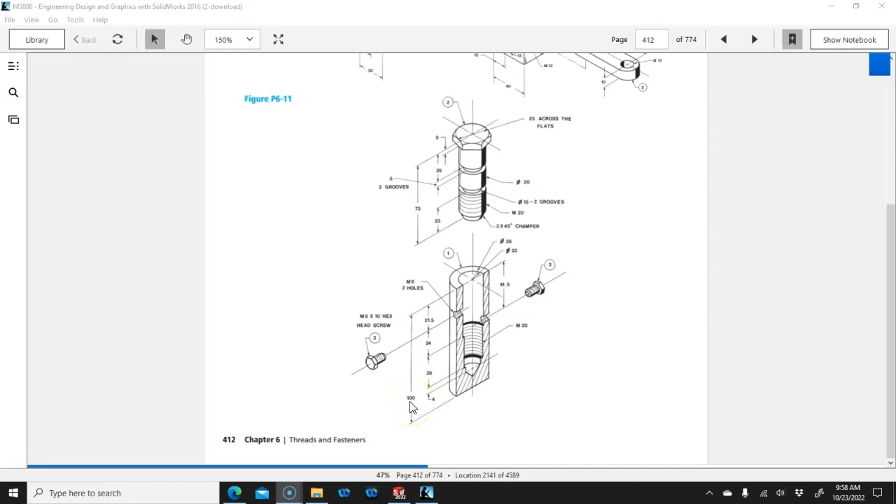The hex screws are going to be from the assembly toolbox or the library of hardware. So let's fly this out of the way. Oh, I don't think it went. There we go.

And we'll start with the screw. So I already have a part open. Now it is in inch, pounds, and seconds, so I'm going to switch over to millimeters, grams, and seconds.

We'll start on the front plane. And I'm going to stay with the S key here, so if you prefer right mouse button and sketch entities, or still have the command manager, it's about time to start experimenting with some of these other options.

So S key and center line, vertical, infinite length. I'm going to place that on the origin. Again, the advantage of our infinite length center line is we won't run out, we won't draw over top of it. There will always be something there.

So this is going to give me a radial, which I'm not sure what I want, but if it's the M20, I can put that in as 10.

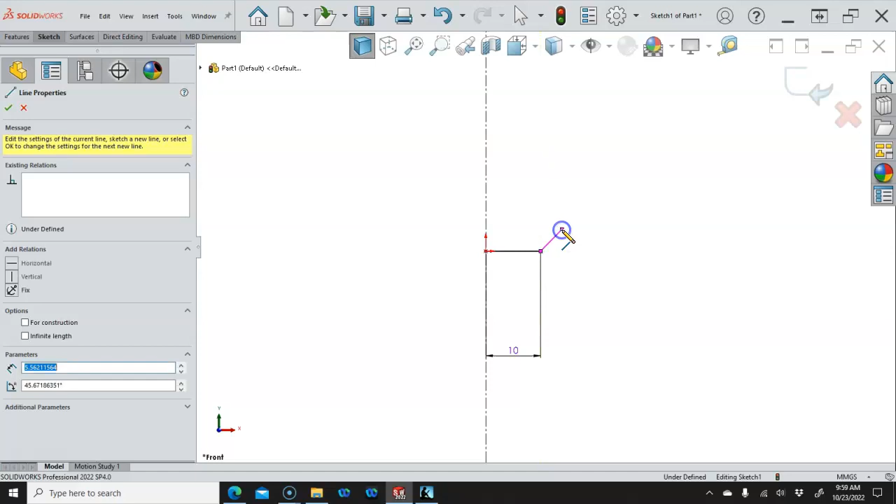And the choice here is, do we include the chamfer in the sketch, 3x45? And these dimensions are going to get a little complicated, so I'm not going to worry about putting them in.

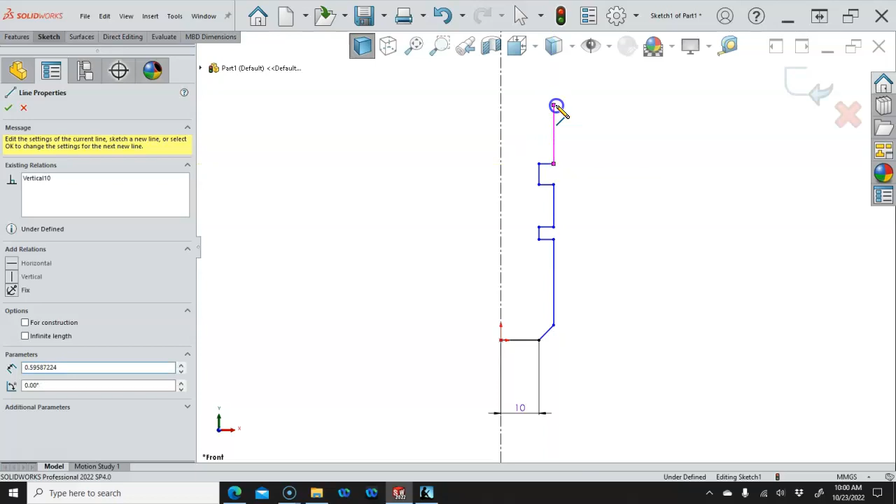And we have the 2 slots. And then we'll pick up for the

hex head. Now the issue with the hex head is going to be, well, it's not round, so if I include it in the model geometry for the revolve, and once I close it off, it goes to that shaded area, so it's part of the region.

If I include it, then nope, I missed that. Let's go back and I'll right click. I wanted construction geometry. All right, so if I include it in the revolve, I need it for reference, but

if I include it in the revolve, then I'm going to have to do something different with the cut. I'd like to just put the polygon on top and be done with it, but then let's see, if we go with the 25 millimeters across the flats, and because those are both construction lines, it's not going to like that.

So let's try a point, and I can go to the point and end up with the 25 millimeter across the flat.

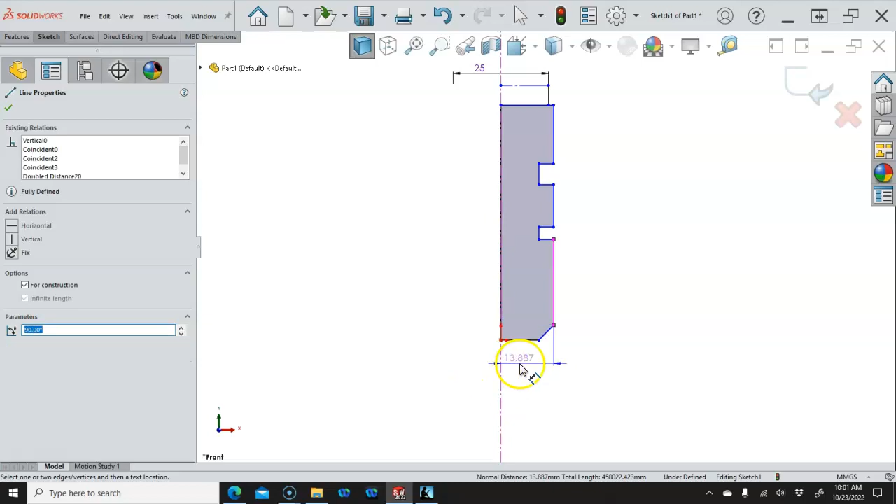Oh, and since I included the chamfer, I actually need to get rid of that one now, and that'll help out. Let's go ahead and apply this as if it was radial.

And let's see, we're at the 10 millimeters there. And let's see if we get out of that. No, I need to actually be in the select.

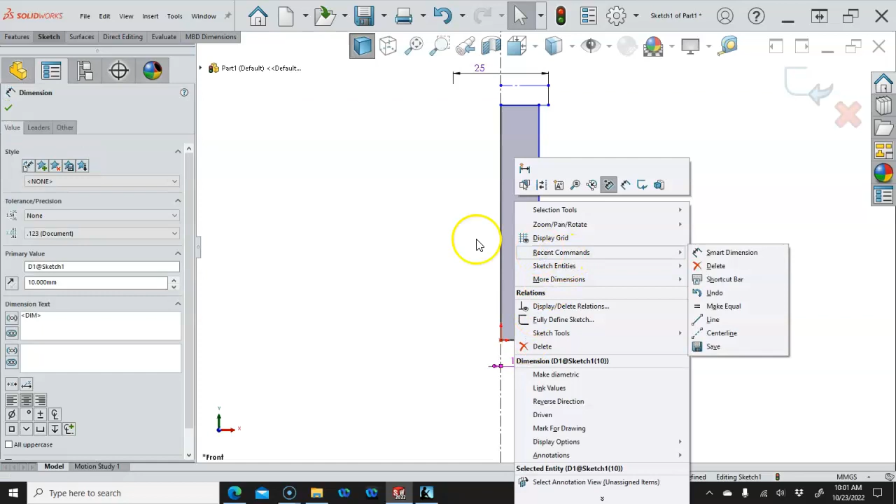So if I pick on the dimension, and I'm not getting those diametric. Oh, so this one is make diametric, so I'm not sure where I was getting those.

So, all right, so this one did not pick a vertical. So the chamfer, so something got coincident or vertical.

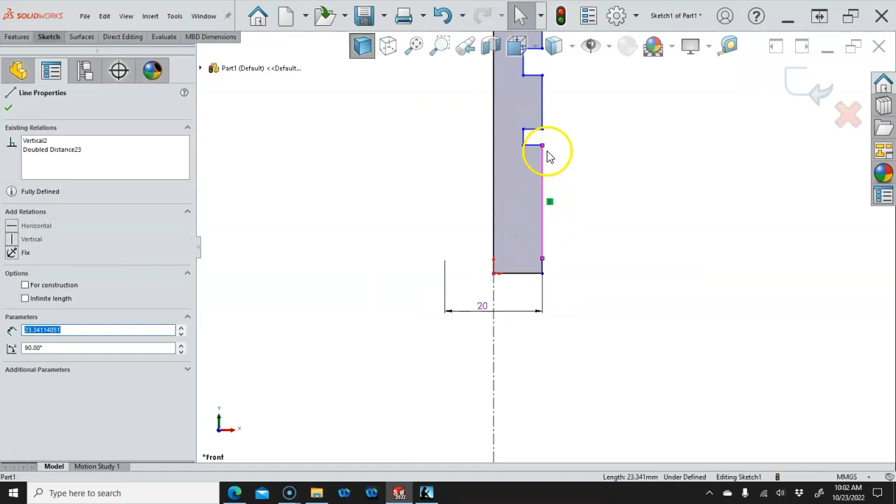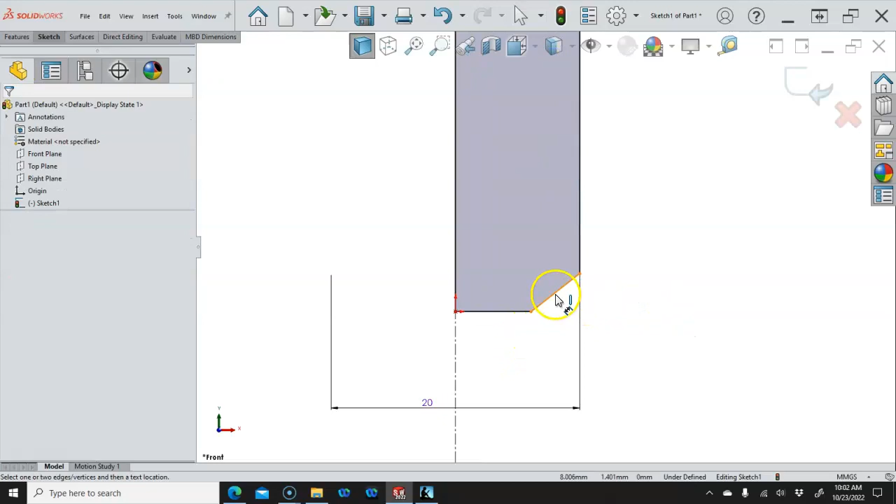So let's see if we can diagnose this out, otherwise I'm going to have to move. Oh, there it goes. I had the bottom one, couldn't see the blue dot. Alright, so we just kind of keep clicking on things until we find which one moves.

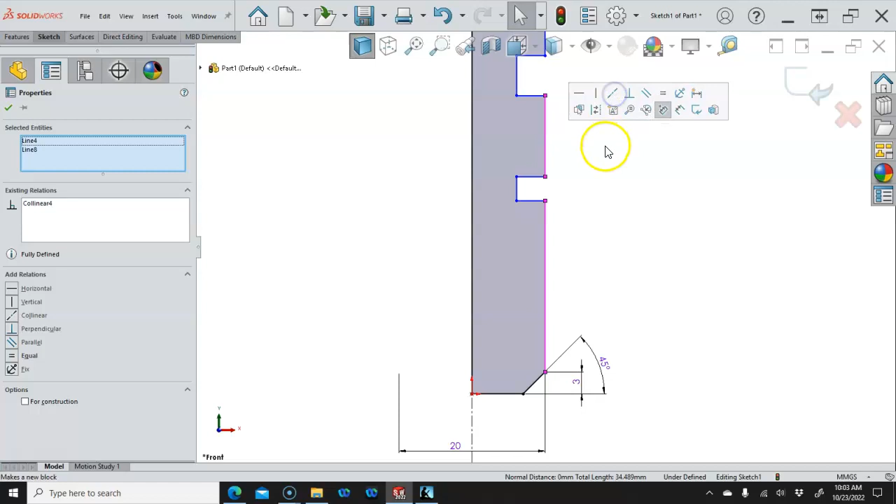Alright, so 3x45 is the same type of definition that we would get if we were applying the chamfer, sketch chamfer, or feature chamfer. And I want those two to be collinear. Actually, I need all three of those to be collinear.

And then the slot is, now we're going to go with the definition. So to the bottom of the slot is 23.

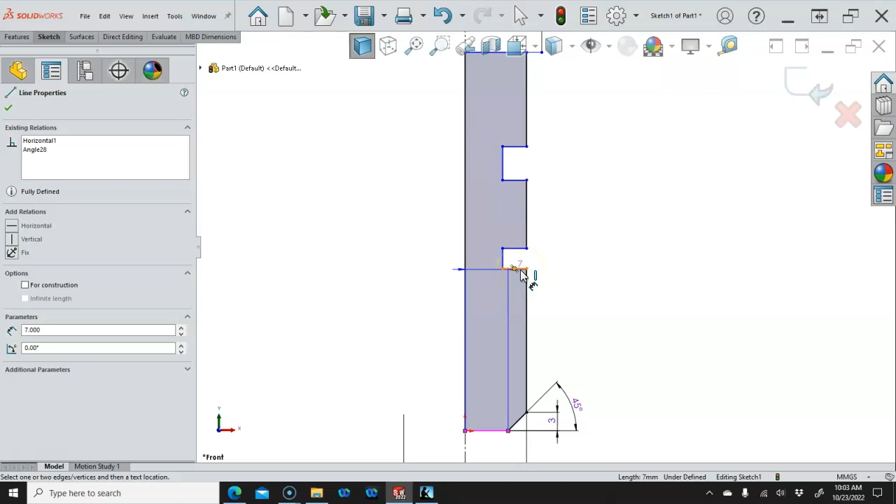And then from the top down, and one of the reasons that we needed the hex is the way they dimension this. So we can do for accuracy, when we make our drawing, we'll clean that up a little bit. Okay, so from the top to the top of the slot is 25. So that gives us our locations. And then 5 millimeters for the two grooves. And since it grabbed the 90, we'll hit escape once.

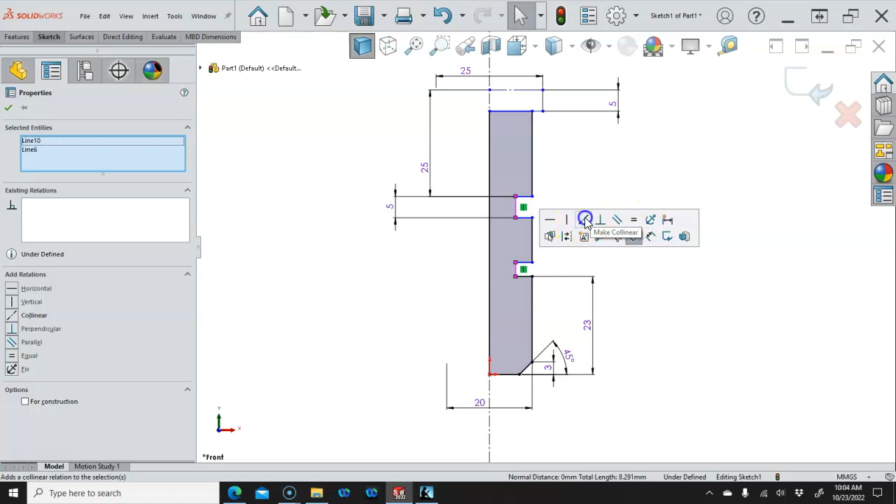And then I can make those collinear as well as equal. And that'll give it the position. And once I pick one of those to add to the dimension, the other one will follow. So if I just come out here to the object line, notice it's highlighting in orange. That's not going to give me the diametral dimension. It's only going to give me radial. So I want to be at 15 millimeters with the diametral dimension.

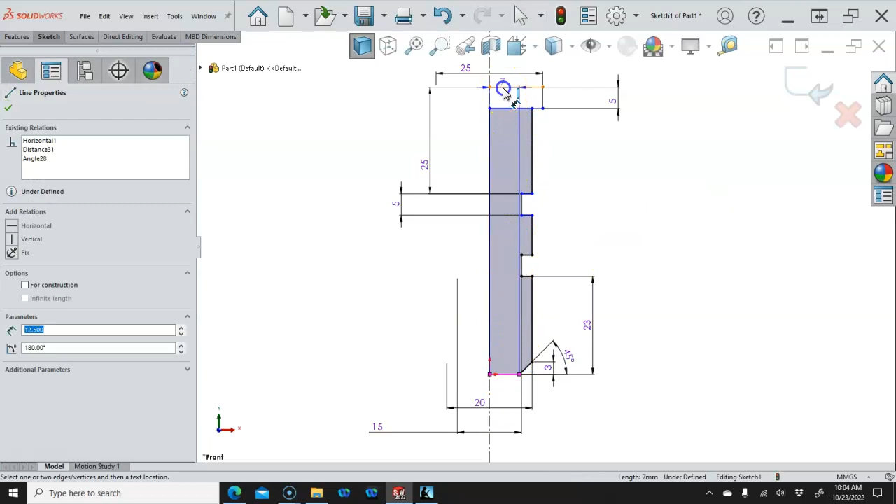And then let's see what's not able, oh, the overall height. So we have an overall height of 73. So just by grabbing that and moving it, that gives me an indication of what's missing and will cause the sketch to go fully defined. Alright, so I think everything's in there. And we have the 25 millimeters across the flat.

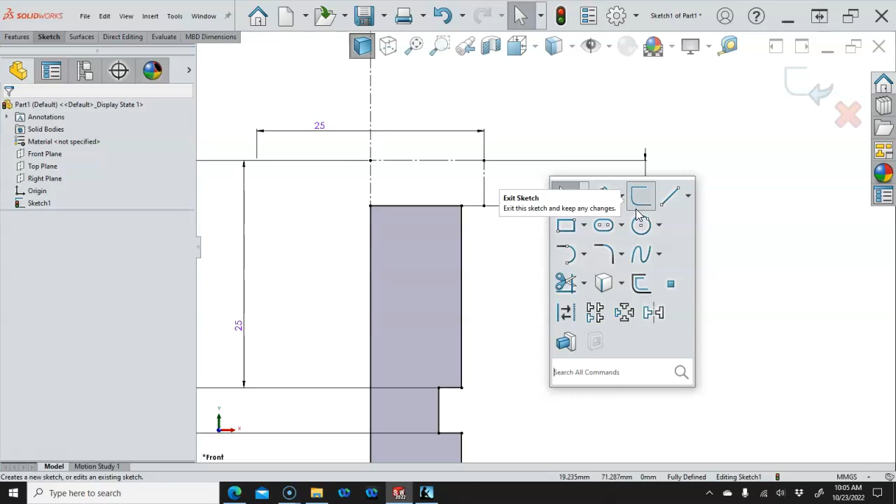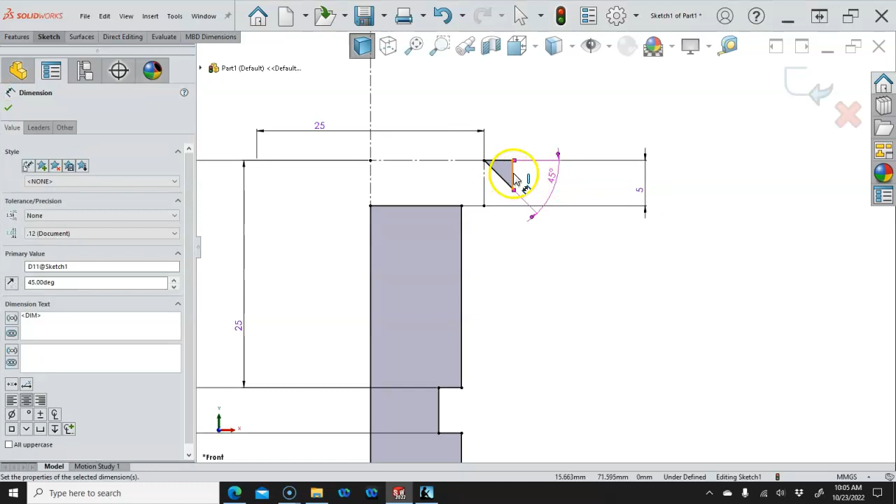So if I were looking to put the, let's see, they call it, I don't see the call out for the chamfer across the top. 3x45 would be pretty big, but it'll pretty much be on the outside. So let's go ahead and just put something in for reference. And no, I did not want the midpoint. So 45 degrees, and maybe that will be 2 millimeters instead of the 3.

All right, so if I go ahead and revolve that, it's going to pick that geometry up. I could pick it as a region and leave it. Why don't we do that? Let's go ahead and pick it as a region, because then I can come back and share the sketch and possibly use that as a cut. So having it two separate features is fine. And because I'm 25 across the flat, I would need this to be to the outside.

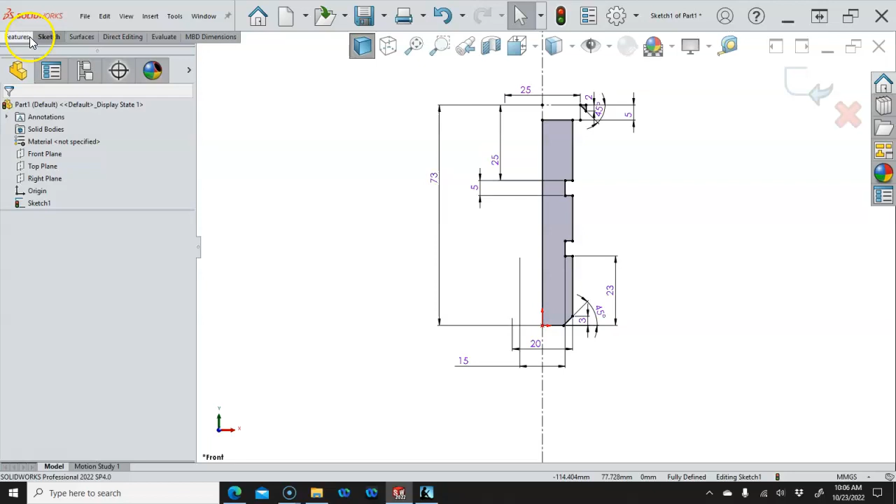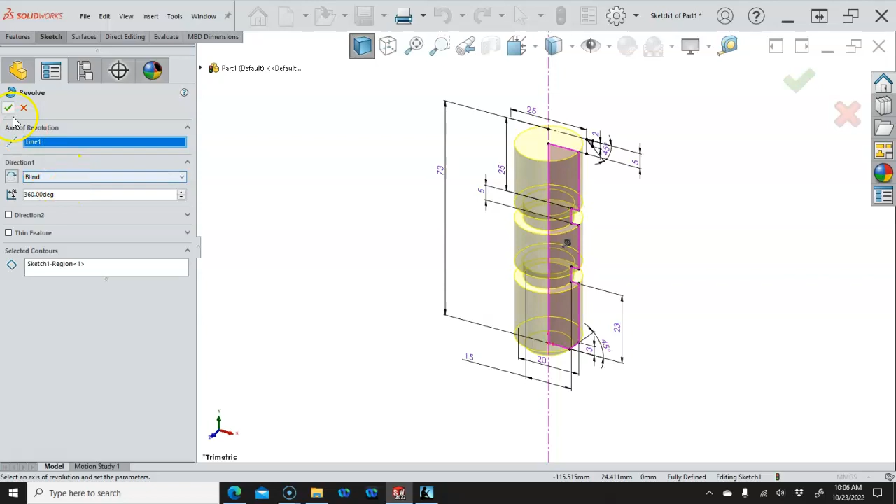When we look at this from the revolve, and I get the hex in place, then I would maybe go to the right plane, could draw that same geometry interior to the polygon, and be able to complete the chamfer cut. So if I revolve, it says they're both enclosed, it's fine, but I really just want that one. So there are multiple center lines, construction lines, so I need to tell it which one, and we're going 360 degrees, so that's fine. I can now go open up the sketch.

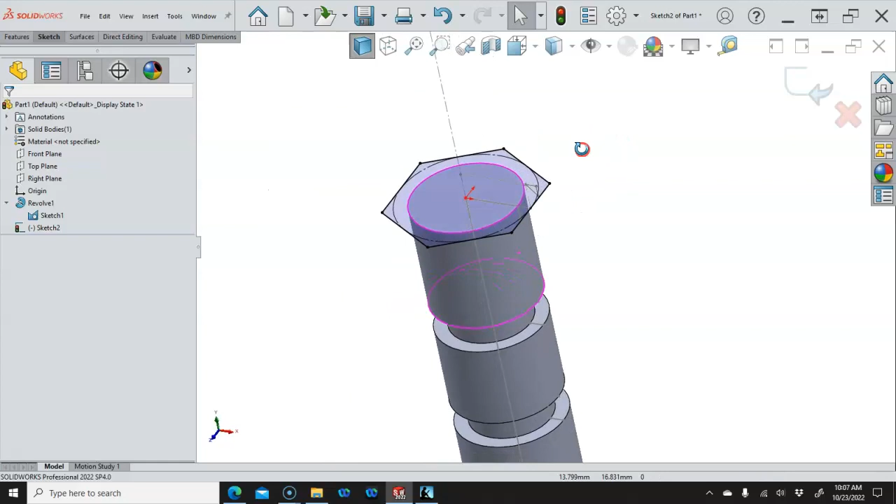We'll go back into the polygon, and if I drag that out, now if I want to use our previous sketch, then I'm going to need to show it, and I can make that coincident with the flat, and one of these will need to be vertical. All right, so some combination of the center point and a vertex to be vertical, or one of the object lines in the sketch to be vertical.

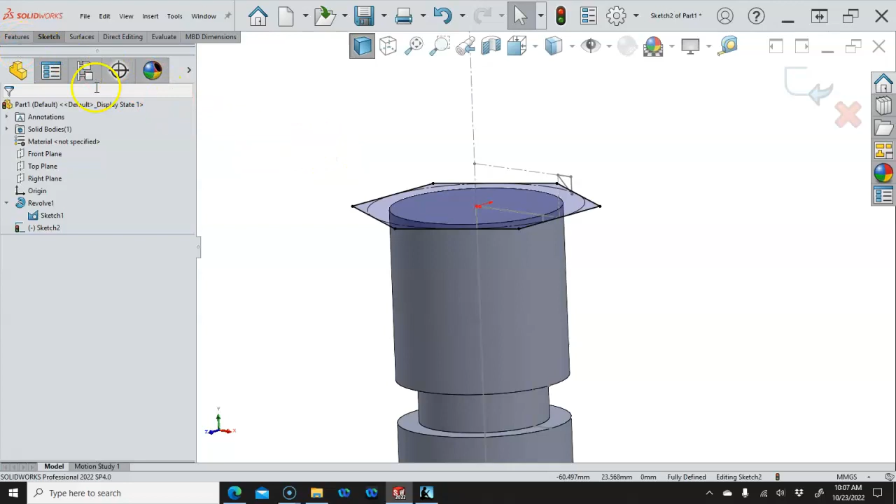All right, and then this is one of those places I could give it the 5 millimeters, but if I'm driving off of that sketch, then we can go into the features, extrude boss base, and this will be an up to vertex. And the vertex is where edges come together or point is generated, and we have that shape. All right, so now you can see it's kind of to the outside of the flat.

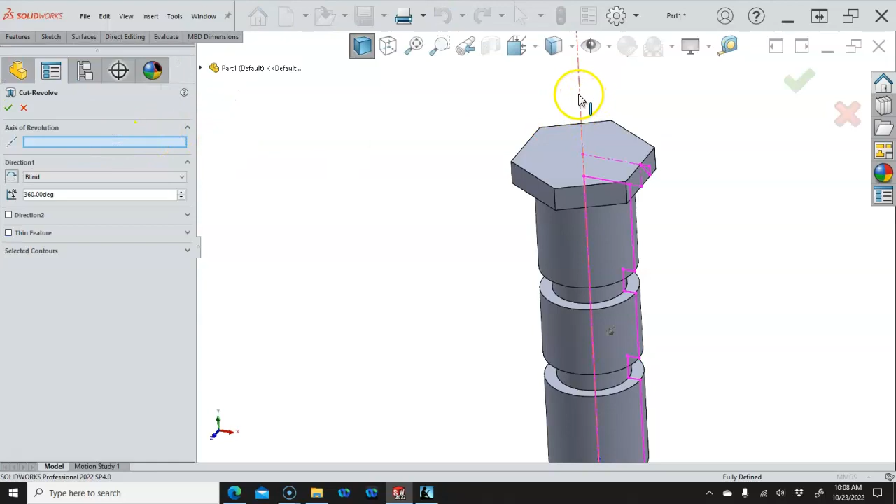And if we go back into that sketch and features, this time it will be a revolved cut, the axis of revolution, and then we need to pick our geometry, which is the interior of that triangle. So when it cuts around the outside, it generates that chamfer.

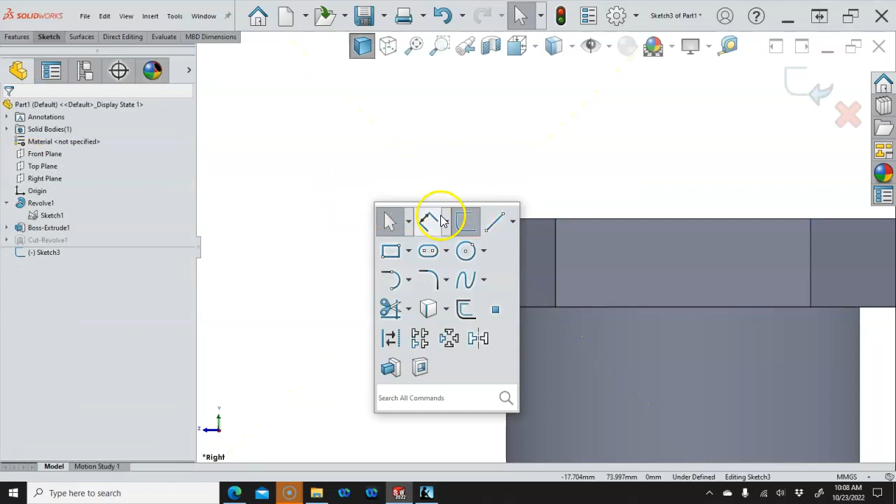All right, the other option then is, nope, didn't want to hide it. I wanted to suppress that feature. So show, suppress the cut revolve. We'll hide sketch 1. And we'll look at doing this on the right plane. And so maybe the advantage of doing this on the right plane is that we are interior to the part. There is a little more visual result there. So 2 millimeters, 45 degrees,

and we could adjust that accordingly. So let's see. We can also, I think I put that on the sketch. So let's see, if we're 25, if we drew that circle, let's make that a driven.

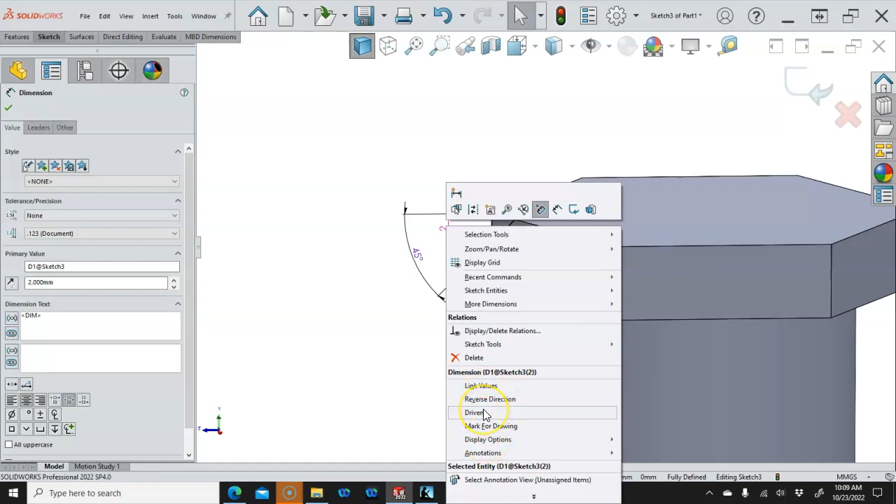And I want it to, or a driven, there it was. All right, so maybe I want to make that a driven part. And we'll go back to, all right, 3. S key center line, didn't do that first, so infinite length vertical. Place it on the origin.

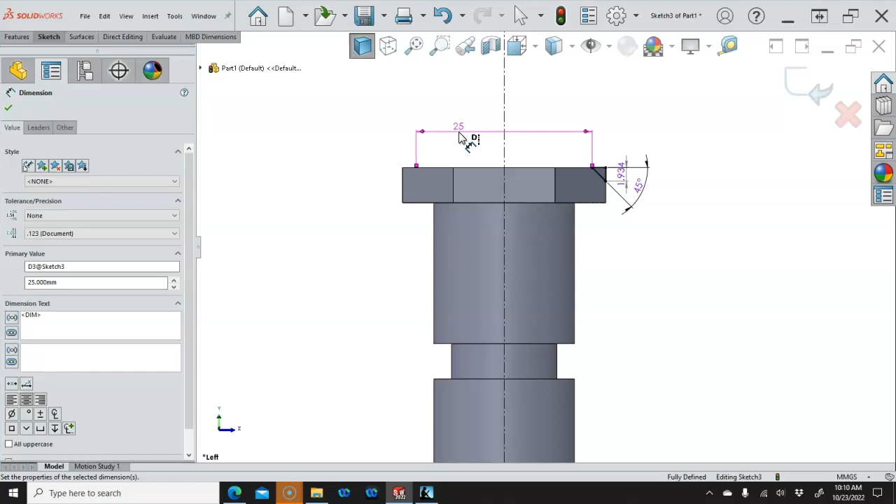Okay, so if we were to go into our dimension and set this to 25, then our value is just a little under 2 millimeters. Is that going to matter? Well, we'll have to compare and see what the result is. So we're going to go ahead with the revolve cut. Now that one you see comes up just about perfectly tangent.

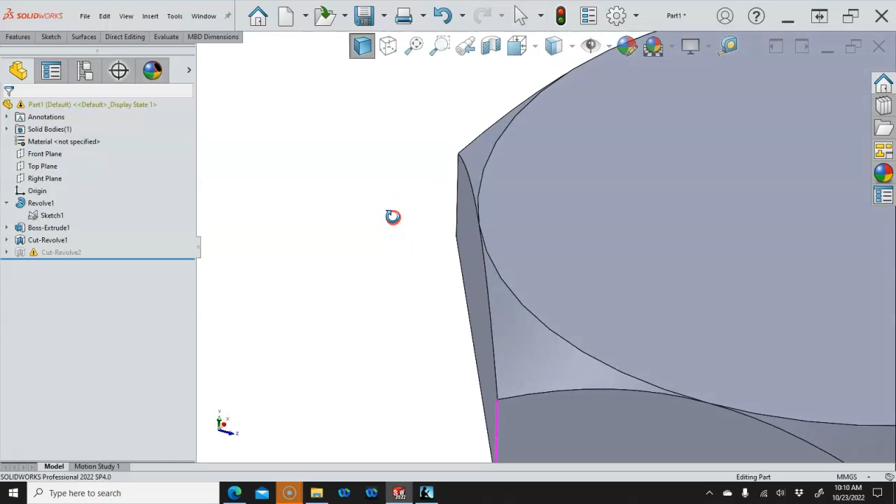All right, so there is the solution 2. If I suppress that one out and unsuppress that one, so yeah, it's always going to bark, even though it's suppressed. All right, so that point, a whole lot of nothing of a millimeter is 0.07, which is in the couple of tenths of a thousandth range, is not showing anything crazy different. So just be aware that under different circumstances you have those options.

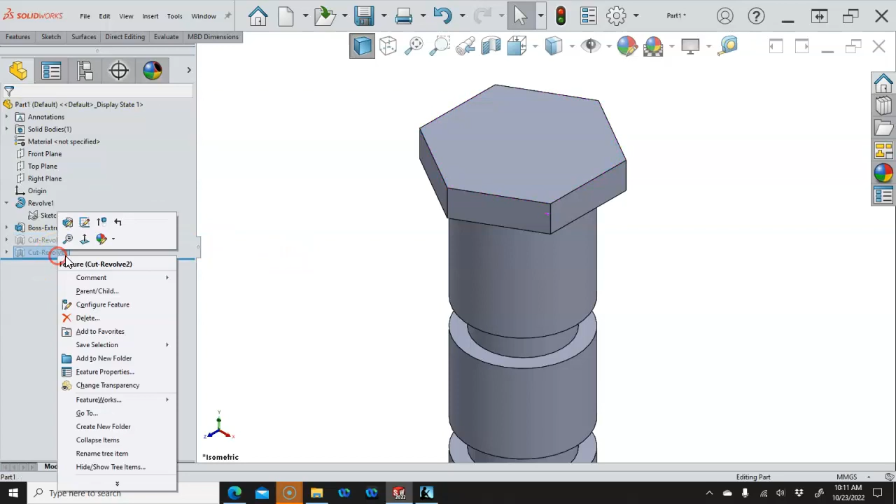All right, onto the threads. First is cosmetic thread, and we're going to do these as configurations. So the cosmetic thread is an annotation, insert annotation. If I was doing a lot of these, I would customize the heads up and add this tool. We'll set this. We're starting from the edge. It's a machine thread. It's showing me M20 by 2.5 as the coarse.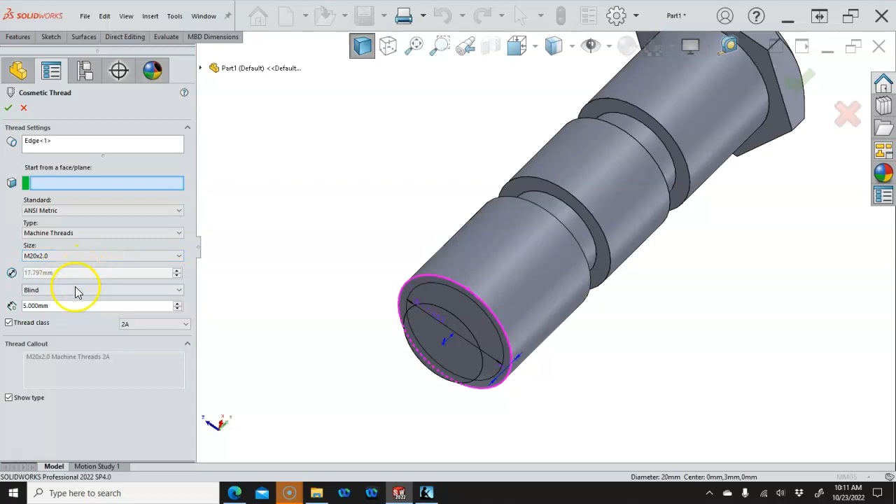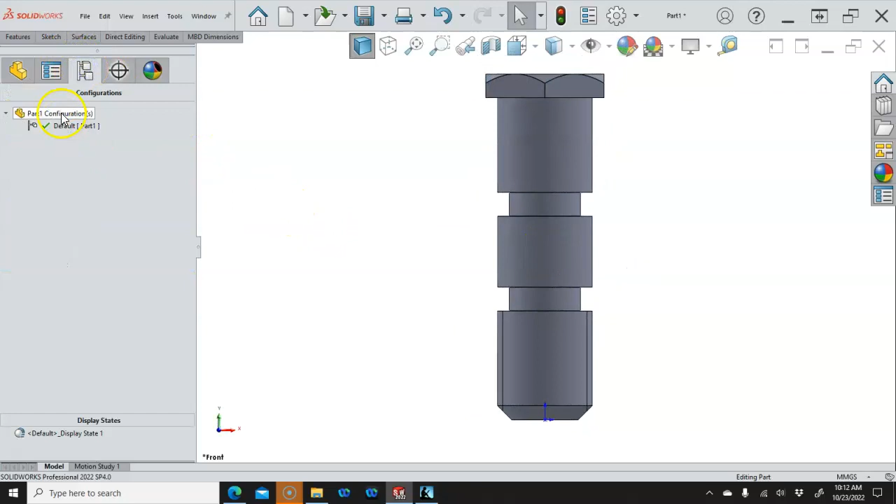I will go with the M20 by 2, and the depth will be up to next. So it should find this edge, and we could probably go with the 2.5, and it wouldn't interfere. So that gives us our cosmetic thread as the default. And then we'll go in, create a configuration. Whenever we're creating configurations, make sure to add configuration. This one is going to be the thread feature.

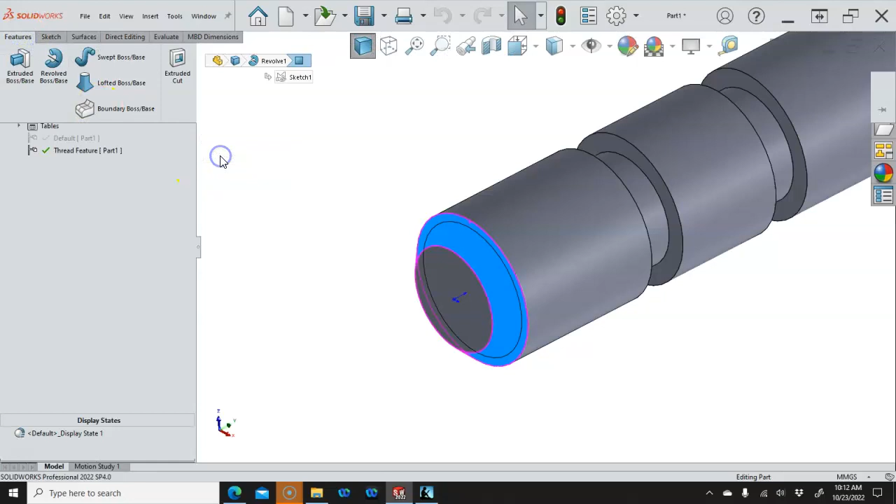And if I pick that leading edge, and then go to the features, hole wizard down to thread, it's going to give me the standard warning. When I get tired of seeing that, I will say don't show again. The thread location doesn't seem to like the pre-select. And optional starting location, we'll have it start off of the part. And with the chamfer, we can go ahead and build that in. And then up to selection, in this case I can go a little bit past.

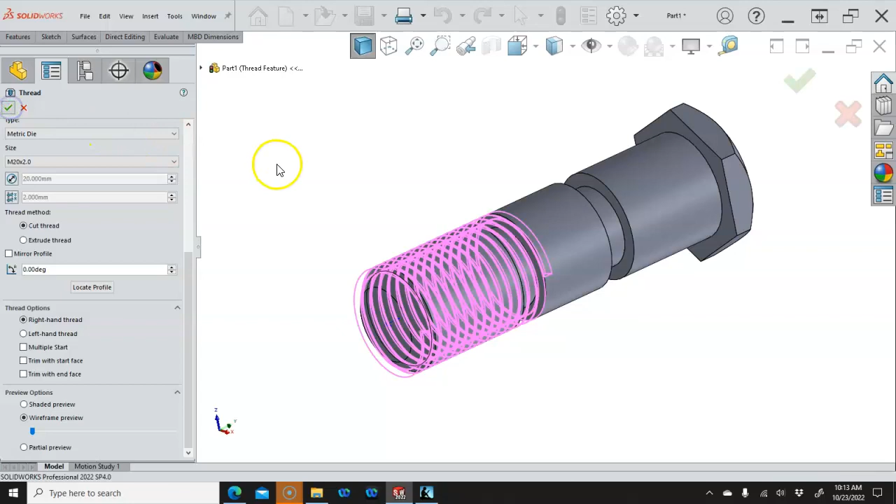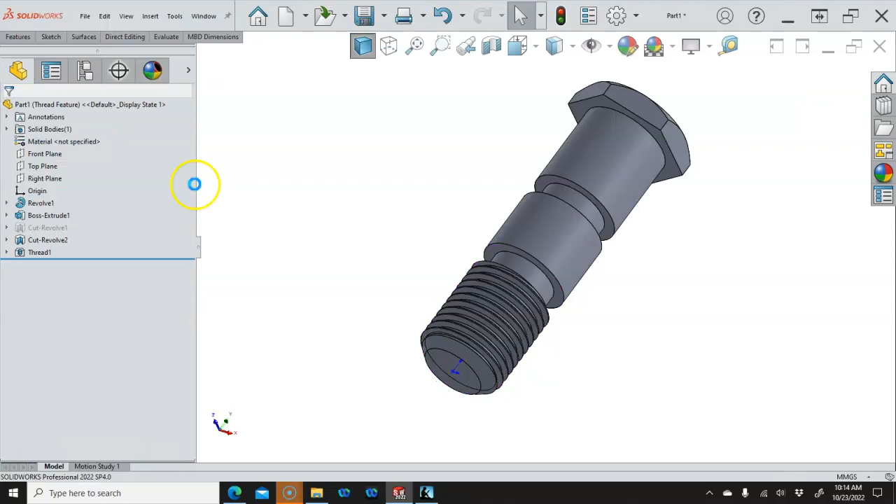And it found the M20, and it is not a tap, it is a die. All right, so metric die. Die is to the outside and the tap is the inside. So M20 by 2. And it will be a cut thread. Since it's manufactured this way, this is the process that makes the most sense to me. All right, so it cut a little bit into the next one, so we'll want to look at that feature and offset it by just a little bit on the face. So 1 millimeter, reverse the direction. All right, and that makes a full cut thread.

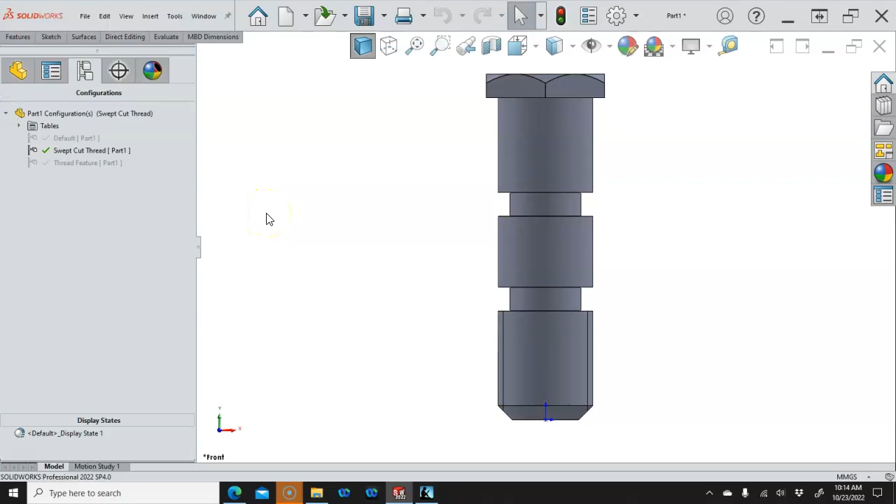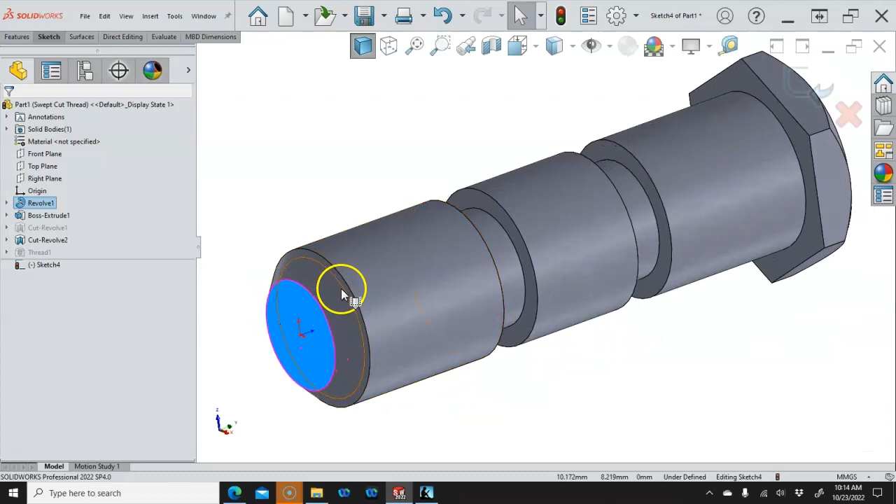So if I go back to the default and then create a configuration, a swept cut thread. And we'll make this optional because there's a few steps in here, and the first time you see it, this is going to be a try it, but don't spend a whole lot of time to make this work. So first thing we need is a curve, and the curve requires a base circle. So our base circle, we open up a sketch on the end, will be about as easy as anything. And S key and convert. And if you haven't added the convert to the S key, just keep in mind that it is available under the sketch. And all we need is that circle.

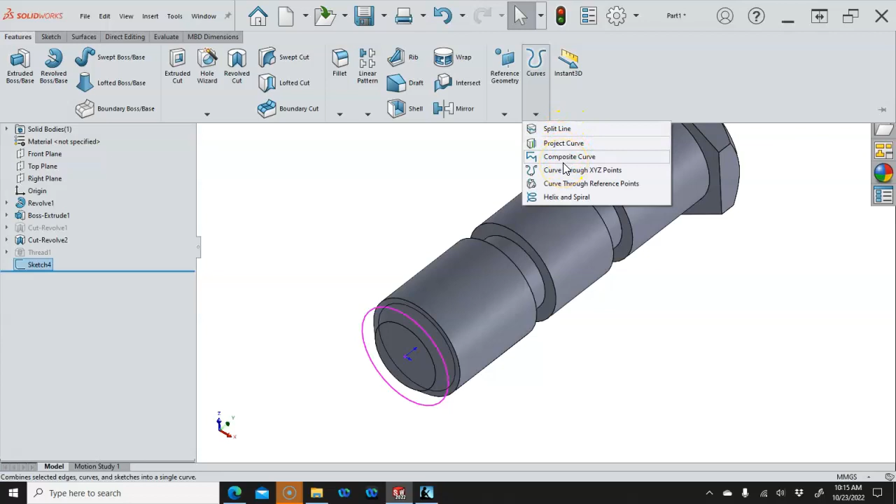And then under the features, we're going to go to curves. And inserting the curve, we want a helix spiral. We're going to reverse the direction. It has a pitch of 2 millimeters. And the number of revolutions, actually we should just give it a height. So I want to do pitch and revolution, or height and revolution, or height and pitch. Spiral is like looking at a record, and if you don't remember vinyl, then it's kind of like looking at a CD with all the swirls, but not really. Basically, it is, as it says, just a spiral.

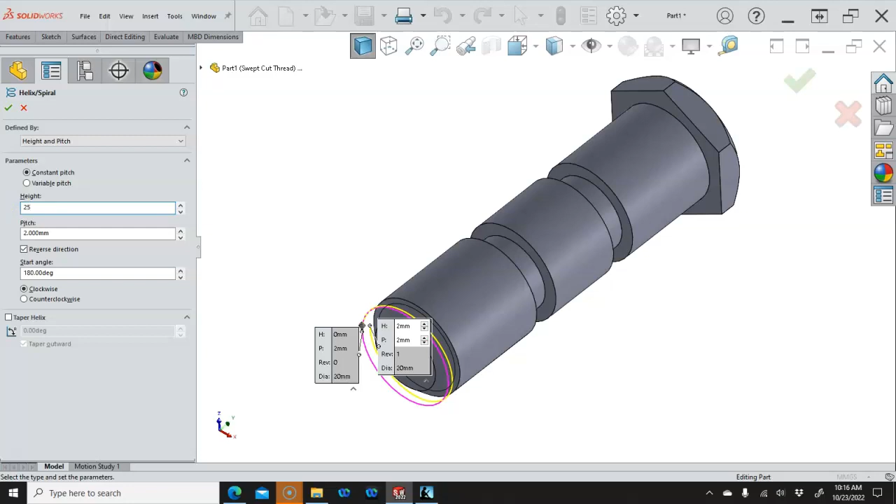Our height for that was 23 from the base, but that's also going to drive where I start or finish. So I'm going to give it a little bit more to the center, make sure that it goes completely off, and then we'll be able to start our geometry. All right, so I didn't really check where that endpoint was. So it should be on the front plane.

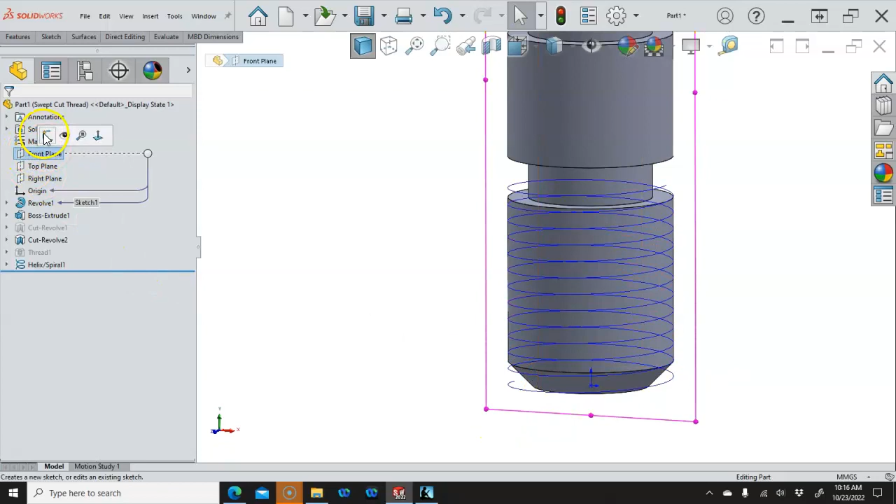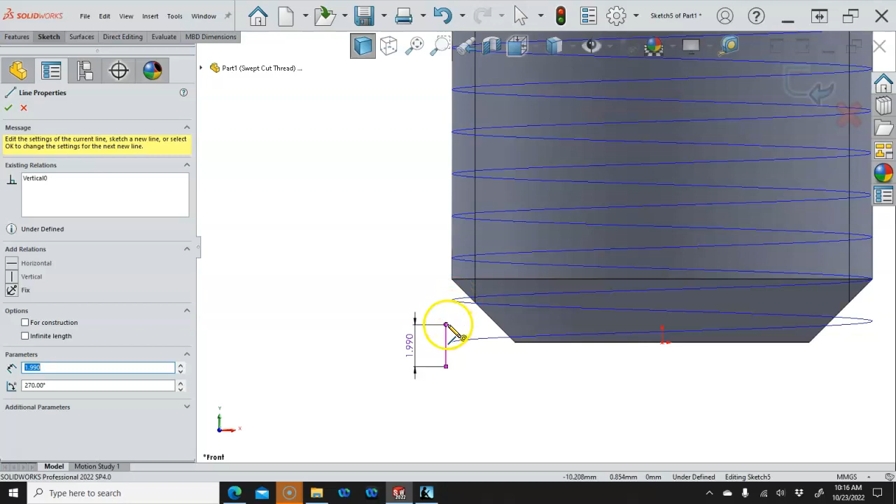That's going to be important because as we draw our triangle, S key line, we're going to create a 1.99. All right, and the 1.99 is important because one of the rules of the swept cut is that it cannot intersect itself. And there's a lot of geometry there to be tangent to, apparently.

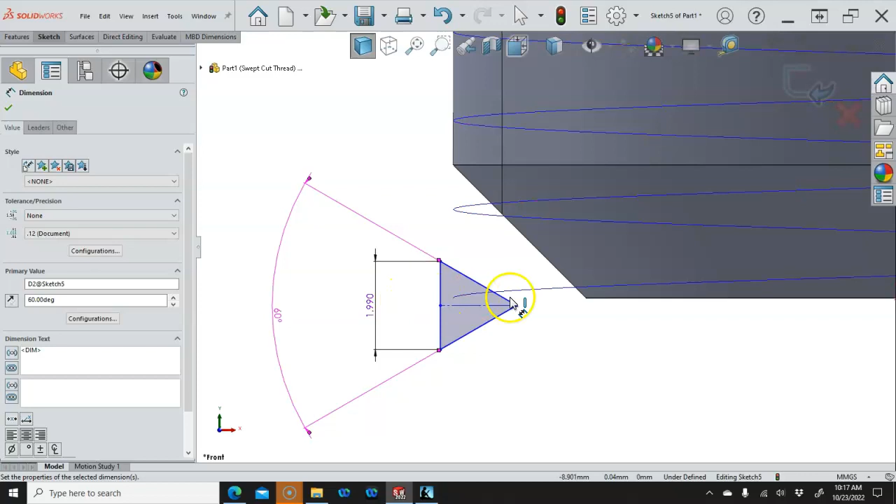So let's go ahead and put that in. We'll make it for construction and horizontal. And as a 60-degree sharp V thread, put in the geometry, and then this endpoint of the construction line can be pierce.

So what pierce says is there are two possible solutions. Where this sketch lies in this plane, it can pierce the curve here or here, times however many we go up. Now in the previous versions, the sketch would not go both ways, so you kind of had to make sure it was at one end. I think there is a setting now for it to go both ways, so you could pretty much pick one of those and still have it be available to terminate.

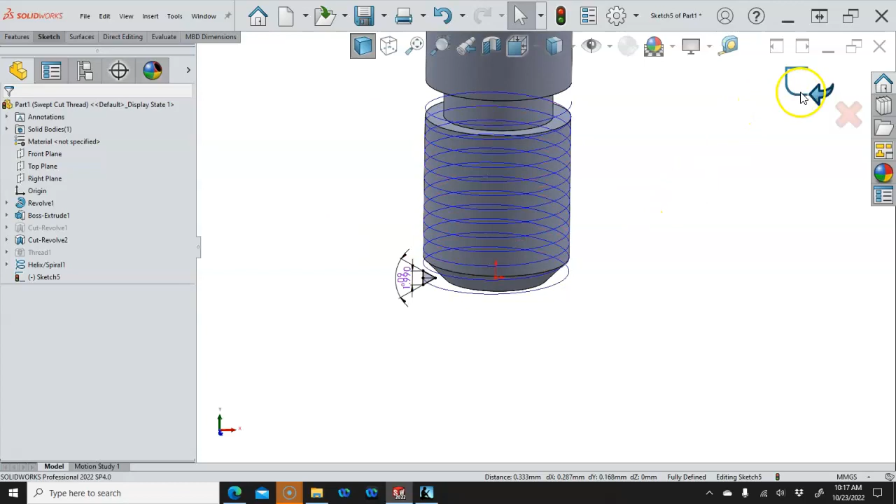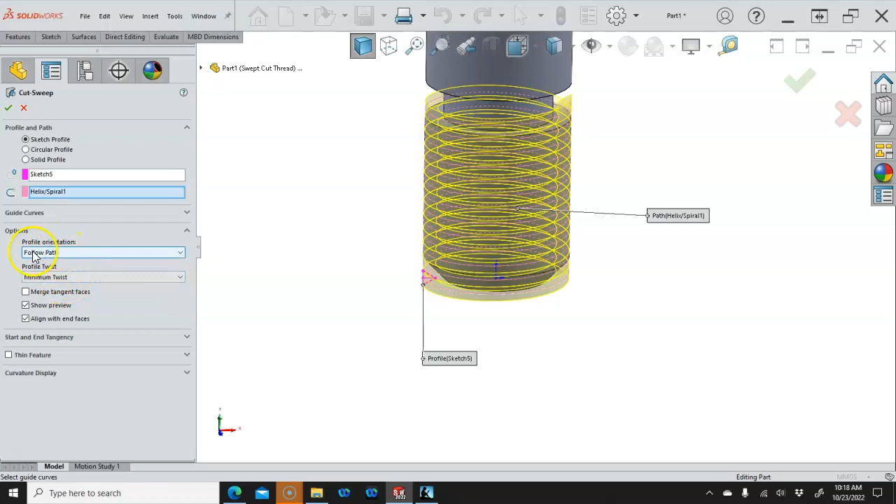All right, so the helix and the sketch, we're going to go to features and make this a swept cut. And again, I do this more because this is how I visualize making the parts. So let's see, align with end faces, minimum twist. Don't really have to worry about those. Follow the path. We see the preview.

And then this is a little sharper. It does not have the root radius or the crest radius. This is a completely sharp V thread. And then after we're done, we'll hide the helix. All right, so that gives us the hex screw.

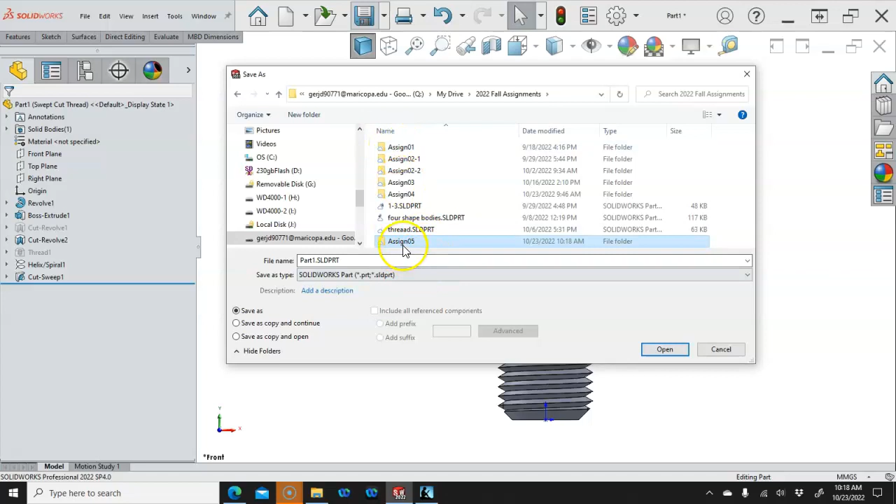Oh, I guess we need to do our document control now. So new folder, assignment 5. And this can just be the hex screw. All right, going to the next, we'll do a new part metric. All right, and then the body,

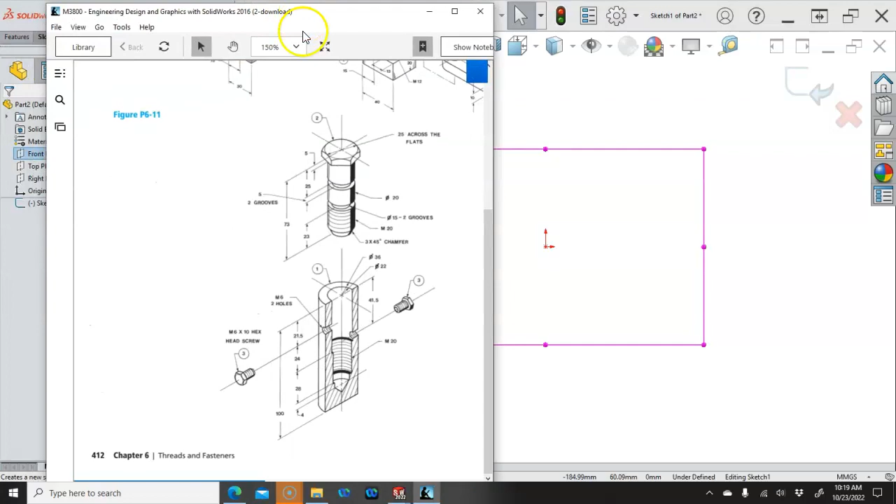we have the choice of trying to put all of this geometry in at one time. Let's fly this back in here. So we can do all of this geometry at one time, or I can create the cylinder and then do the revolve at the interior. So when in doubt, make it simpler, cleaner, not more difficult.

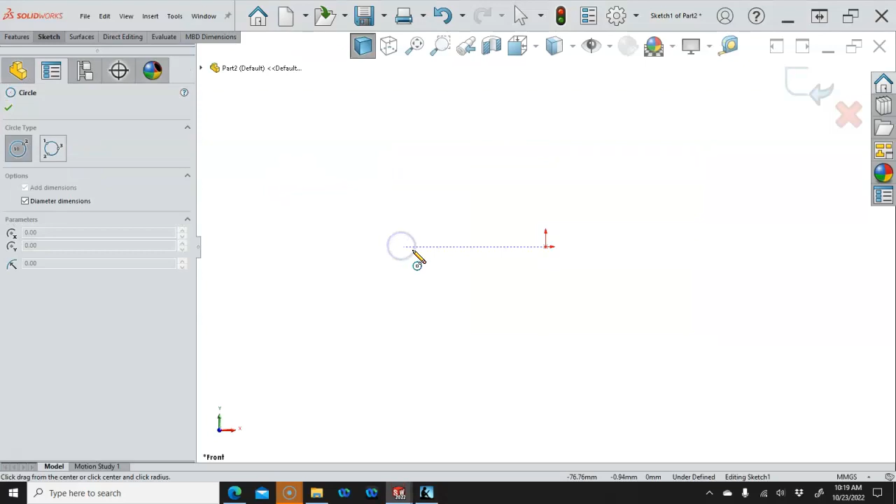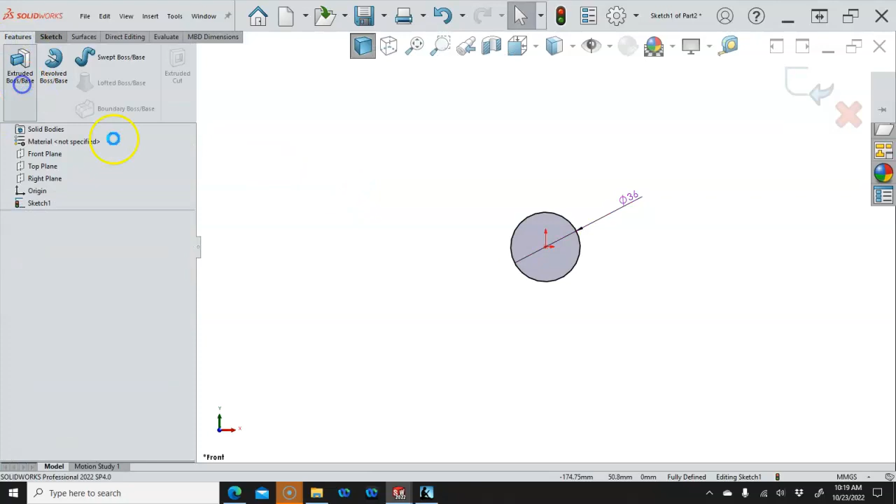So what I just did, and this would be a good place to take a look at changing sketch planes, is I drew this in the front plane, but I really kind of wanted it to be in the top plane. So we're going to take a look at what that entails. So we had a diameter of 36, and I'm going to go ahead and extrude this so we can look at the results. Sometimes they can get a little strange. It's a blind end condition to 100 millimeters.

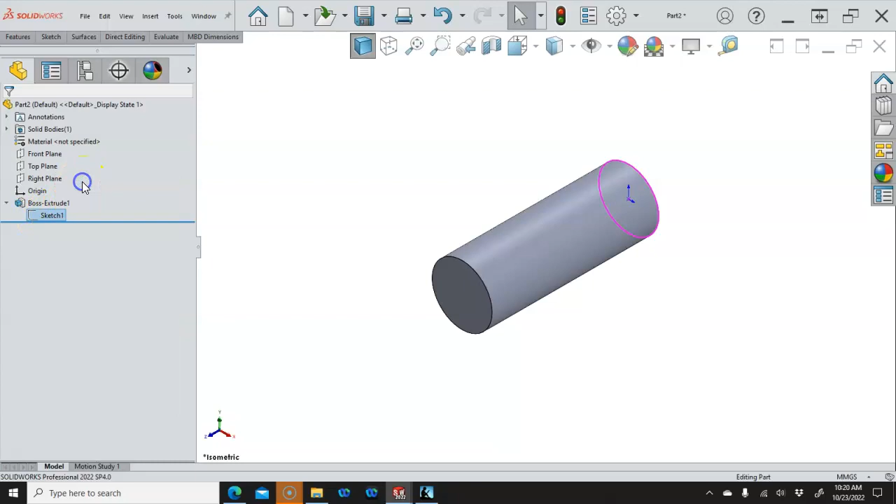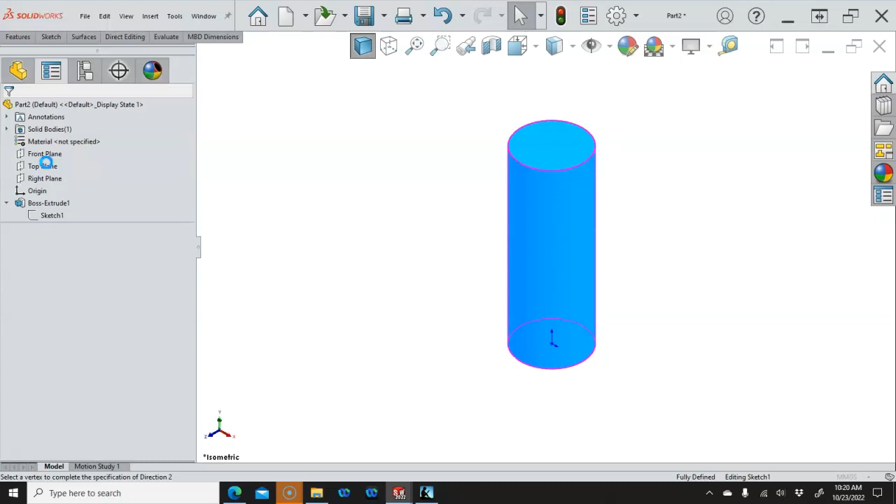And so I see it make the extrude, I go to the isometric, and I think, wow, this would be great to put into the assembly in a vertical orientation. So I can right click on the sketch, go to the sketch plane, and instead of the front plane, we're going to go pick the top plane. All right, so as long as you catch the geometry soon enough, you have kind of a 50-50 shot. It may point down, which in this case we would just edit it and reverse the direction. And go ahead and leave that.

It doesn't matter which way, we're going to be generating this geometry interior to the part. So again, sketch on the front plane. And as we go in and start our geometry, infinite length vertical. Oh, I picked a regular line, so that's for construction. Make sure that that went fully defined. And then the line.

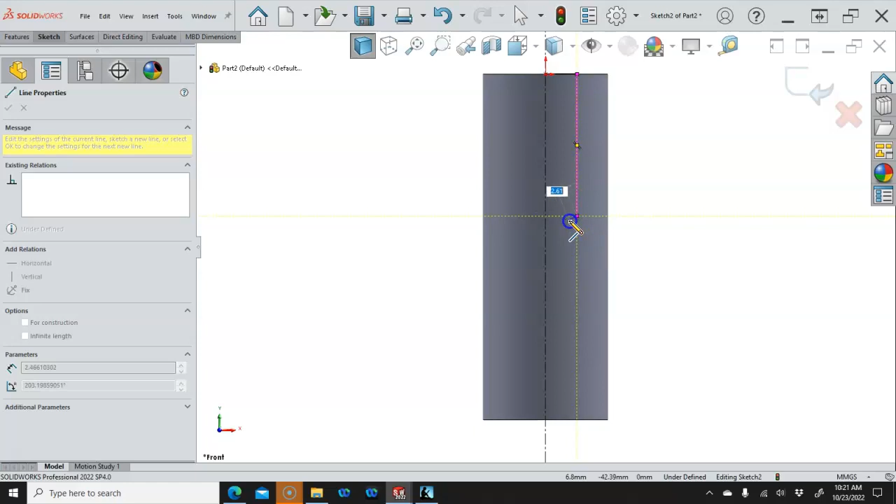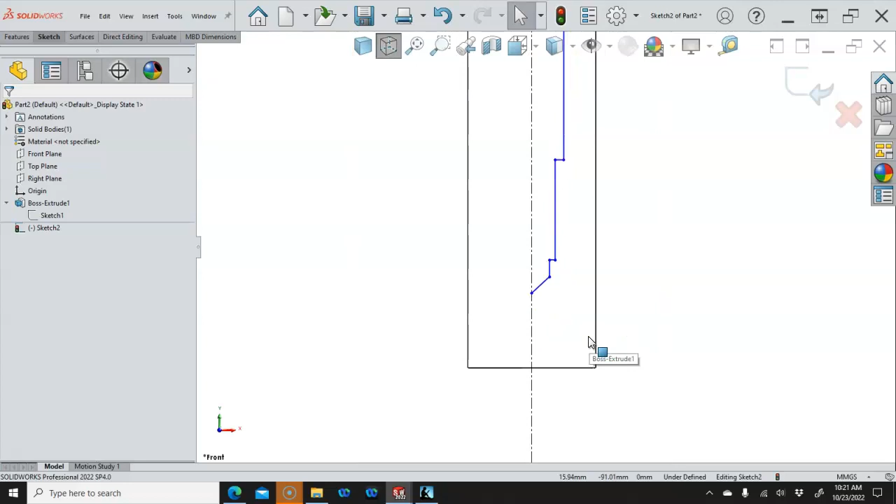And we come down some distance. And then we're going to move in and pick up to the base. And it's a little difficult to see, so going with hidden lines visible, and a little bit of a step, and then the 118-degree drill point. Looks like 118 anyway. All right, so we need to close this off so that it is a region that can cut. And apparently I missed that one, so let's try that again.

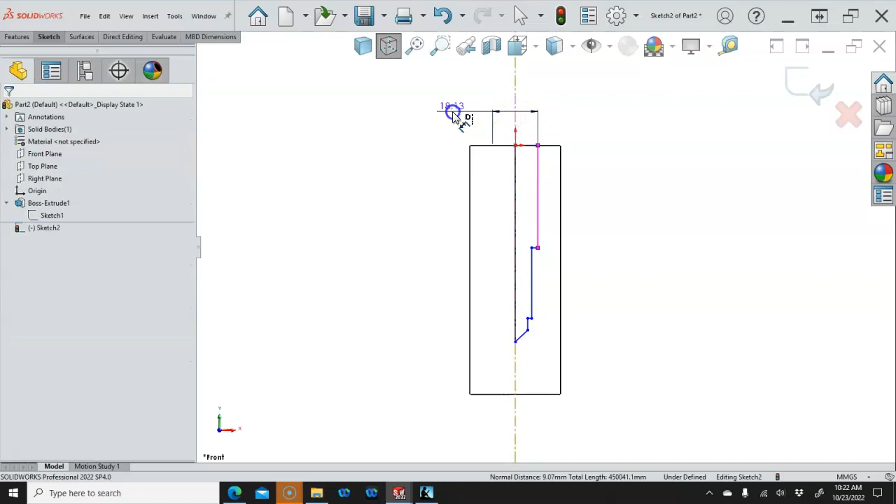All right, so we'll go through and start putting in our dimensions. Make sure you're picking the center line, so we have the diameter of 22. Gives us the clearance. To the hole centers then are 21.5 and 24. So we'll go from the top.

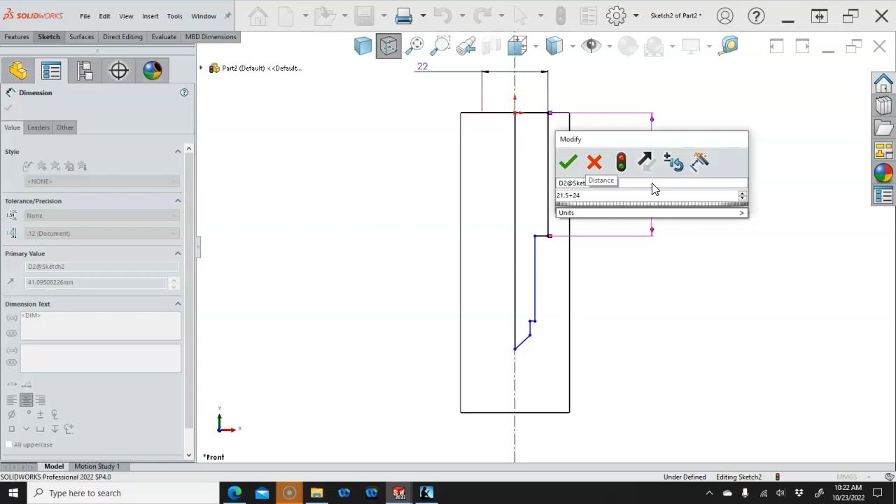I don't want to do that math in my head, so 21.5 plus, make sure I'm typing it in right, 24 should give us the 45.5 to the step. And then the overall here is 28.

And then we have 4 millimeters for, hold up. And then for the drill point, whatever, oh, I guess I really didn't get that diameter. And the M20, you know, I look at that and I think I wouldn't put that step in there unless there was some other geometry that we're missing. I really wouldn't put that step in there. I would just take the tap drill and run it all the way to depth. So I don't see anything called out.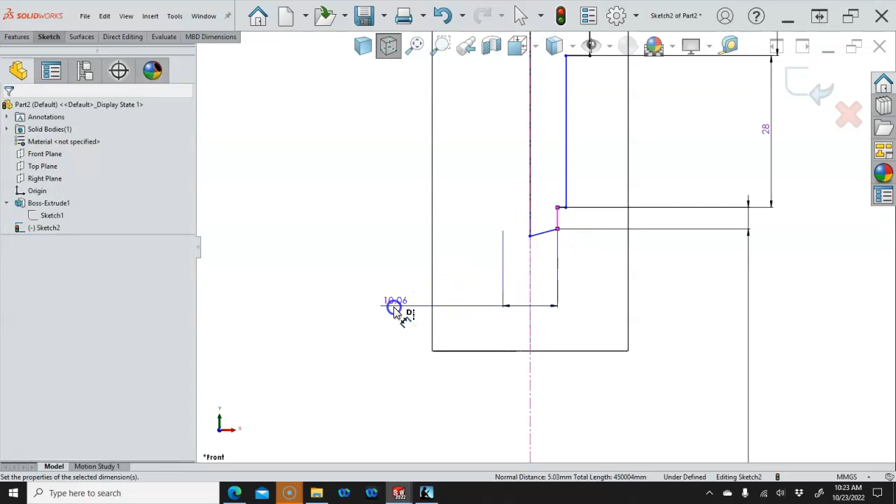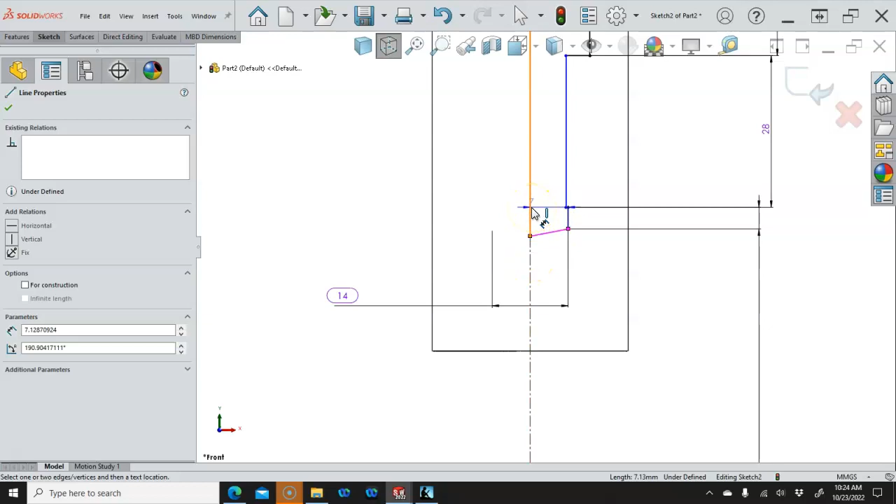And maybe if we do the 20 minus the 3 millimeters times 2, that would give us 14. All right, so just a number to start. Anytime I have a missing dimension or a guess dimension, maybe that becomes for inspection. And then, same with the angles as the linear dimensions, if I just want a half angle, no, I may be getting that confused. Now we'll try it. No, pulling it all the way around to the adjacent. So 118 degrees divided by 2 would be 59.

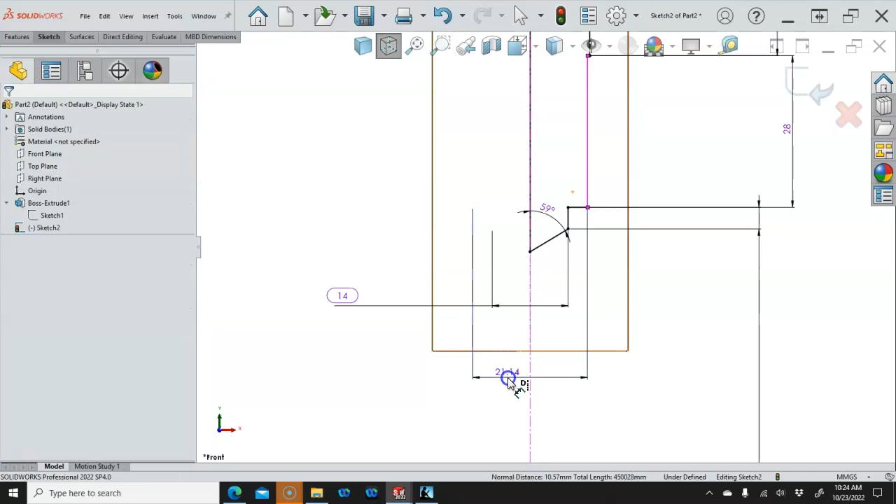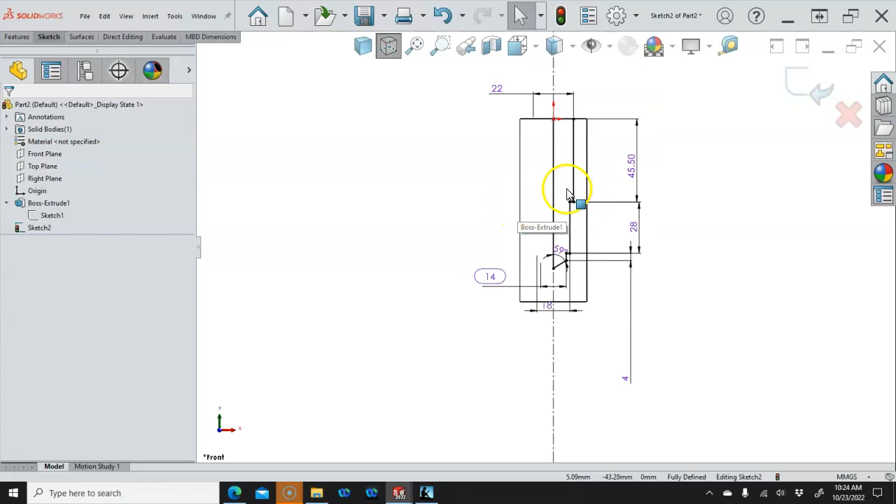And I need to drag that one out a little ways. I was hoping that when I picked the center line, it would just give me the full adjacent angle, not the wraparound. So with our metric, M20 by 2, take the 20, subtract 2 from it. It gives you 18 millimeters as the minor diameter of the M20 thread.

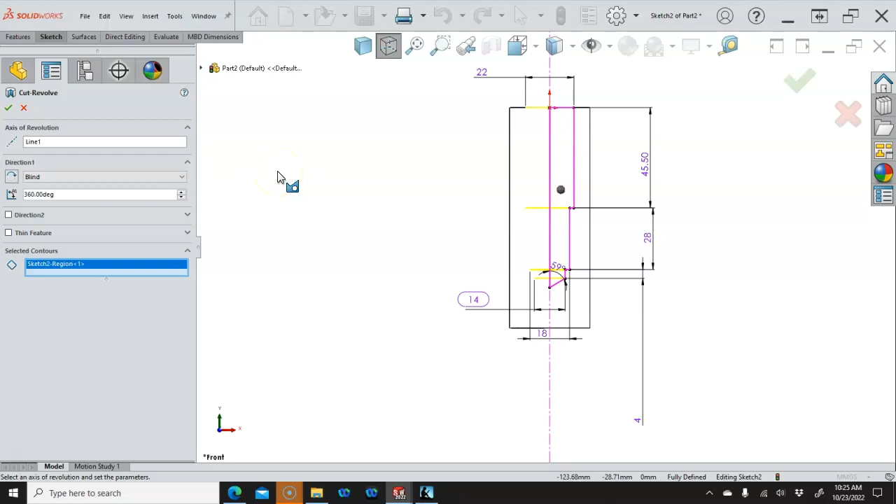All right, so we're going to go into the features, perform a revolved cut, and the axis should not be, unless I missed something, or I have a gap somewhere. Well, we'll see what it does. All right, well, we got the geometry in there, so that's pretty much the main thing. All right, so I've been telling everybody for a long time, stay away from the 3D sketches until you actually need one.

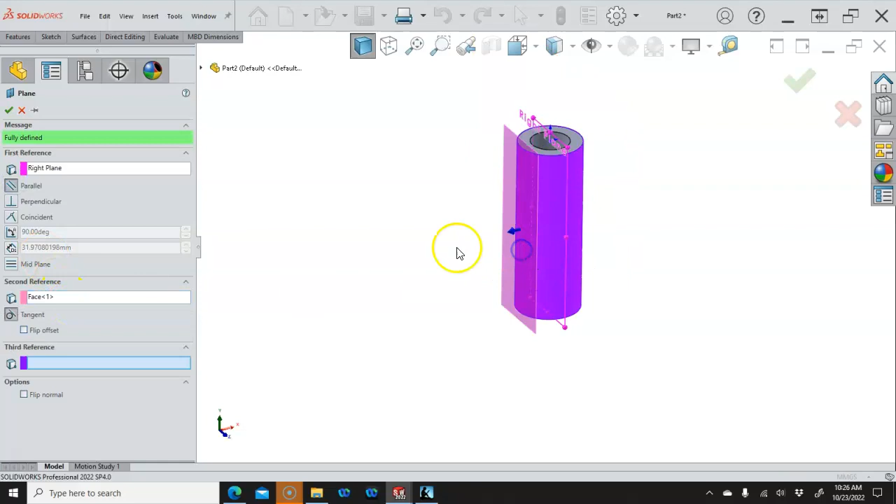All right, so we're going to do the threaded hole, the M6 by 1. We'll do that in 2 ways. So if I take the right plane and hold down the control button and click on that plane and drag, I will get a reference plane. It's going to be parallel, and my second reference will be tangent to the cylinder. That makes it nice and convenient for the hole wizard to pick up that geometry. Alternately, we could have gone features, reference geometry, plane,

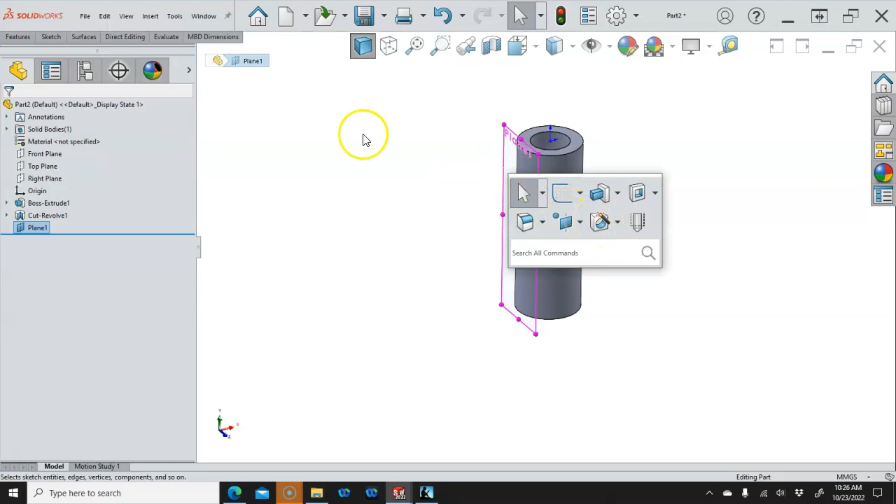and when I pick that plane and hit the S key, or we go into the hole wizard without picking it, when we go to positions, we're still going to ignore that 3D sketch on this one, but put it into that plane. All right, so threaded hole, ANSI metric, bottoming tap is fine. M6 by 1. I don't want it to do through because it will go through both walls, so just up to next. Probably don't need the thread class, countersinks, all of that.

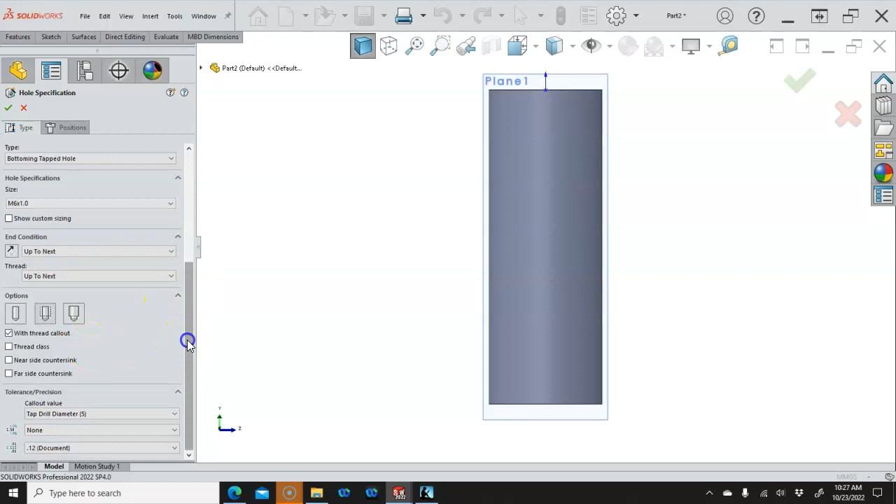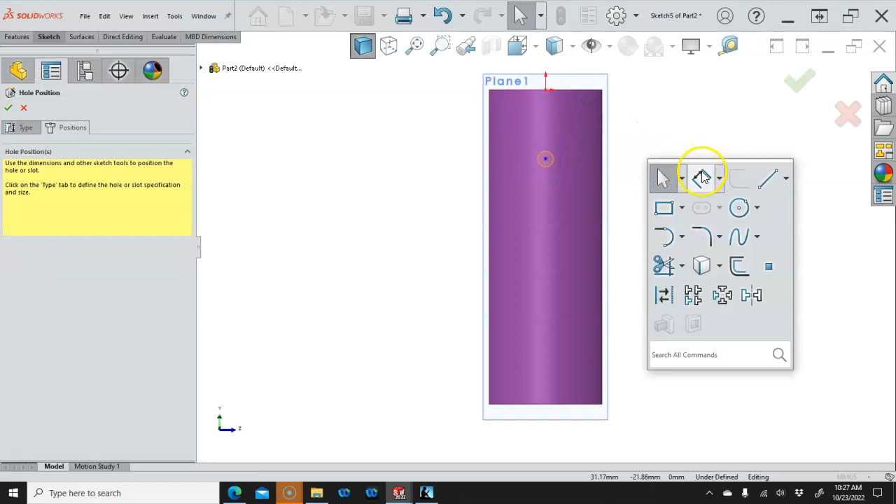So we'll just go into position, and on this side, I guess it didn't keep that. So whenever I see that 3D sketch, I'm going to go grab the plane again just to make sure. And we'll select, control select, go vertical. And then in our dimension, bring this down to the 21.5 and accept it. Alright, so we can check that by going back to the front plane, doing hidden lines removed, hidden lines visible. And if I go back in and hide that plane, then that just kind of cleans up.

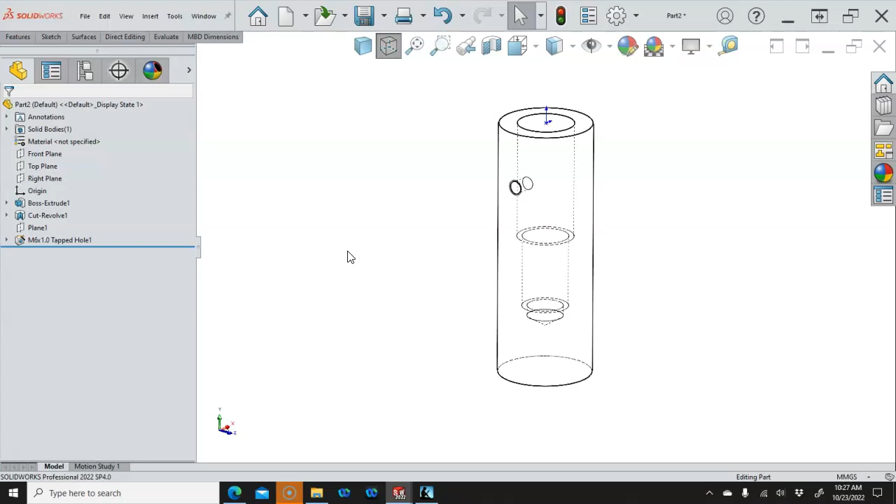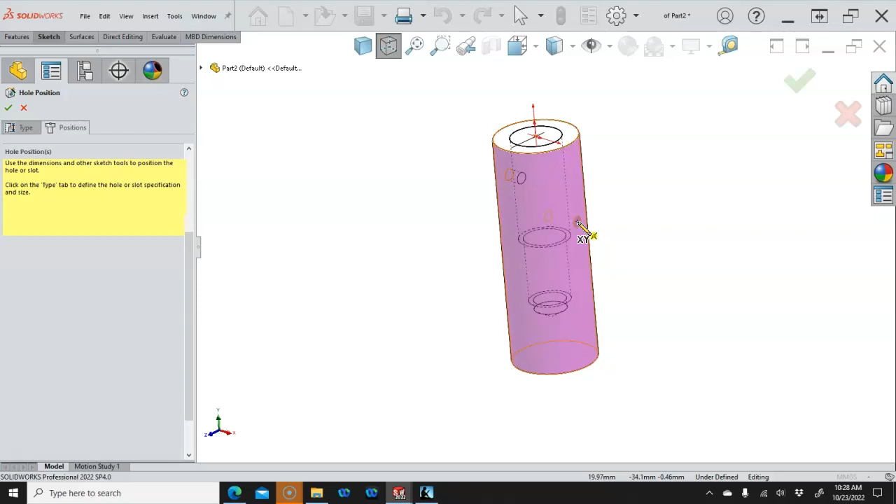Alright, so alternately, we do the same thing. S key, hole wizard, M6 by 1, everything looks good. And this is the case where I tell it I want a 3D sketch. The advantage of the 3D sketch is I can put this anywhere. The disadvantage is I got to figure out how to get it related to something. So that being the challenge, we'll go ahead and place it close to where it's supposed to be. And we'll look at this from the right side.

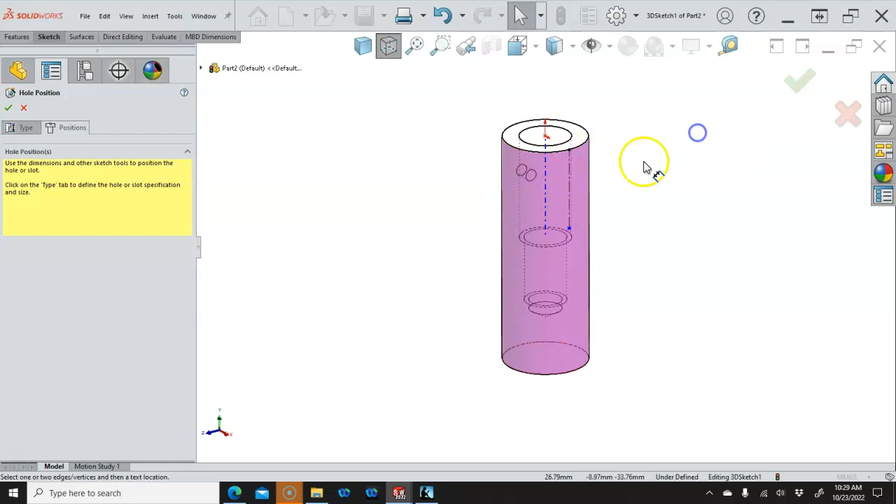And this can be along Y, so kind of making it vertical. Didn't like that, because it's pretty much tied. It's trying to make it vertical to that point. So why don't we go with a center line for construction, and I'll make that vertical. The end point of that can be along X, and then instead of dimensioning between the points, I'll just grab the center line and make it the 41.5. So kind of a different set of rules, different set of choices with the 3D sketch. And the difference you're going to see is sketch 5, sketch 4, 3D sketch 1, sketch 6.

Alright, so I think that's our geometry and we're ready to assemble. Make sure to save this. So this can be the base, pretty much whatever you want to call it. And we'll go through the assembly and the toolbox and drawings next.